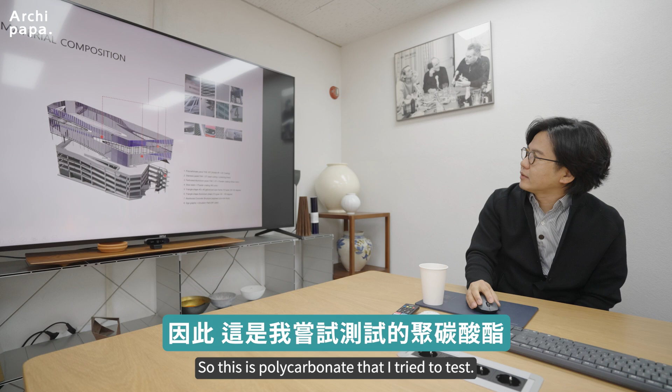So this is the polycarbonate that I tried to test. It's translucent, but it depends on the lighting - if the light is outside, it looks like glass, reflective, because of the radiation coating and UV coating. Thanks to this coating, it reflects much like glass. But if the lighting is inside, it diffuses very differently, and we get different images.

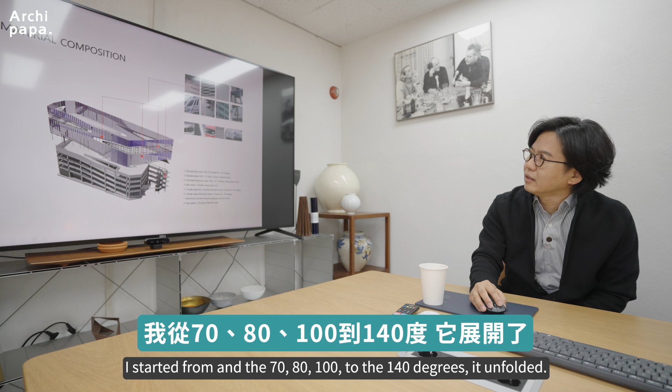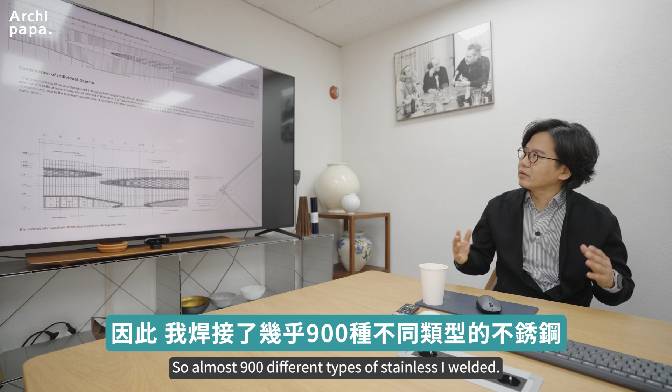This angle is a 60 degree triangle unit. I started by hand, and it unfolds from 70, 80, 100 up to 140 degrees. It's quite complex because it's in front of the road, and I really needed an interesting detail to express the density - that's the reason I used these triangle details. It's quite difficult to calculate digitally, so almost 900 different types of stainless steel I welded myself. It's really a kind of craftsmanship.

So this is the look inside. The lighting inside is indirect, reflecting from inside to outside. But in these images, if the lighting is outside, it seems like glass.

It's a very interesting material characteristic. That's the reason I named this building Herma Parking Building. Herma means Hermaphroditus from Greek mythology—not a man, not a woman, right? This is a mingled human. Look at that structure, it's very typical.

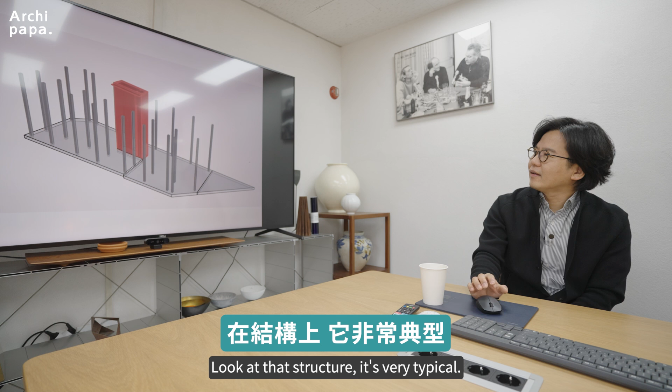Yeah, it's very typical—simple and cheap construction in concrete, and this is a steel stairs. The cladding is wrapped with plastic, polycarbonate. Cheap, yeah. And then I designed this opening. I got inspired from the grill of a car, since it's a car parking.

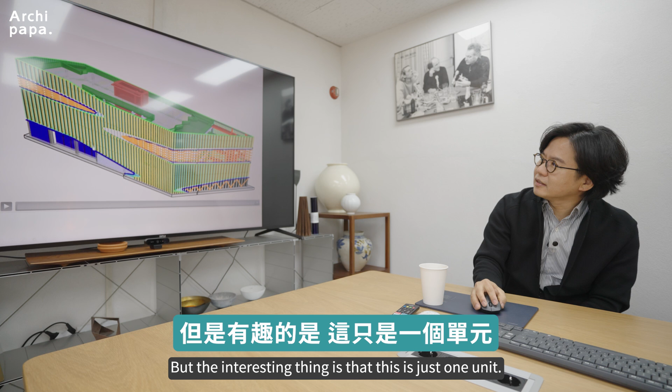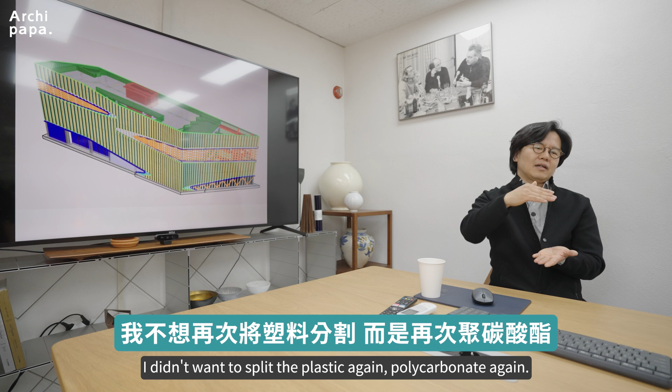But the interesting thing is this is just one unit. The plastic polycarbonate had to be imported from Switzerland, so it had to be shipped by container—maximum 12 meters. That's the reason I split the facade into two parts. This is the 12 meter section. I didn't want to split the polycarbonate again, so this is a one-unit design.

I tried to understand the maximum length of polycarbonate they can produce in Switzerland, and how I could get it shipped by container. This is the maximum polycarbonate I can use in Korea. So the design came from understanding this logistics process.

You really came up with a very new, unique building. You got a lot of work on this project—so how was the feeling about it? I've learned a lot of things there.

I spent most of my time at the construction site. As I told you, I didn't set up my personal office—this is the office, yeah, this is my office. So I learned the way of welding from workers.

Someone told me there are a couple of types of welding—do you know arc welding, TIG welding? Which welding is appropriate for aluminum and steel? Very realistic things I learned there. Stainless steel we can weld with TIG welding, but in that case we need a special spray to apply after welding, to protect from the light and such. Those kinds of very realistic details I learned there.

I understood the process of logistics. This is quite important—to check and understand the budget. This was a very limited budget. I tried to calculate everything—how much polycarbonate I needed, how much stainless steel—trying to find a solution.

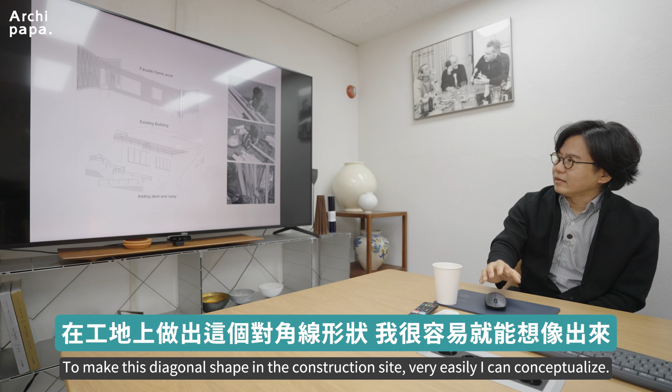And then they just bend with the diagonal shape, making this diagonal shape in the construction site. Very easily I can conceptualize.

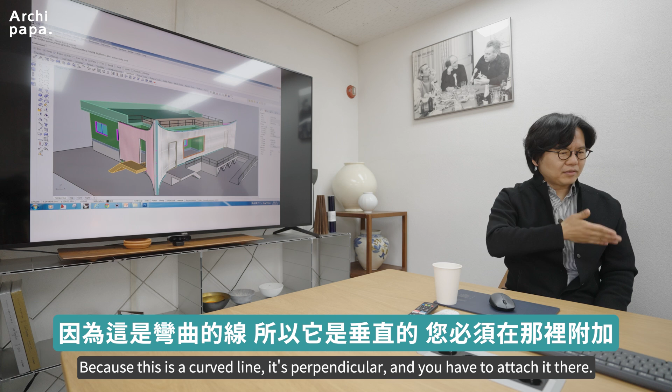The most important thing is I have to calculate exactly how much quantity of this material is needed. So I calculate with different angles of the unit of the aluminum. This is not really easy because it's a curved line, and perpendicular - you have to attach it there. It's a detail that seems very simple, but in reality it's quite a complex design because this is a 3-dimensional design. So I calculate the aluminum, and this is steel, and then I calculate everything.

I showed the client, I convinced him, so I could finish this project.

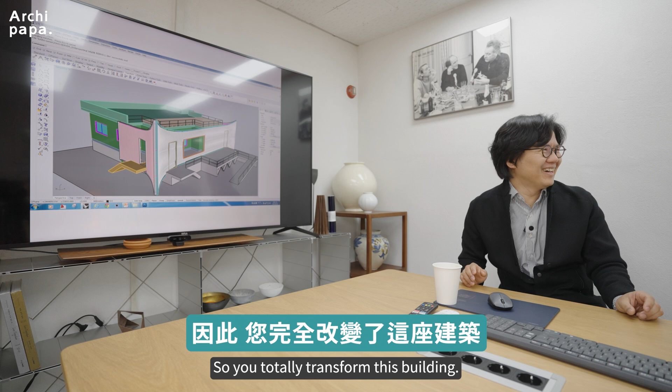So you totally transformed this building. You can see Shigeru and Zaha in this project. You really merge the essence of these two architects - the aluminum as the paper tube, or this digital fabrication kind of idea, is all in here. And then the Korean identity in a way - Korean architecture tradition, building, merges the cultural side, the digital side, the material side.

This is the second project. You kind of finding your way into it.

Little by little, yeah. I was struggling always with the limited budget. I had tried to find a new client.

I think there's a process of understanding the Korean reality. So I have to control the budget - how much quantity we have to spend in the construction site, how much percentage of logistics we have to invest the money for this project. That is really important to raise up the quality of a project. For instance, if we save just 5% of the budget of each project, it's a really big issue. It can change the total design.

The detail, we can add it. I try to understand the construction reality and I involve myself in it, and I try to find something, and I finish with my detail on the construction site.

That's the point. So through the Herma parking, this remodeling, I drew this detail drawing. I was worried they would never understand my detail - like this angle is very accurate, there's a 1 degree curve or something. I was worried about it.